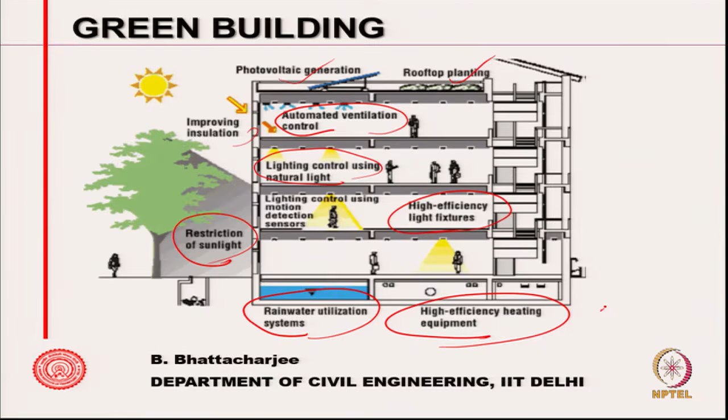LEED actually started in USA, Leadership in Energy and Environment Design. There are similar parallels - it is essentially a rating system, and its knowledge base is actually a lot of information. So there are several of them worldwide. For example, this I have defined, Leadership in Energy and Environment Design.

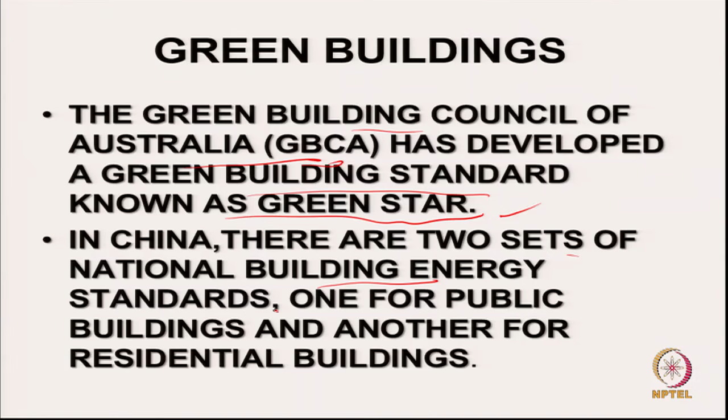Now, Green Building Council of Australia, GBCA, has developed a green building standard known as Green Star. So LEED is one of them which started in US, Green Star is in Australia. In China, there are two sets of national building energy standards, one for public building, another for residential.

Green Globe Environmental Assessment and Rating System represents more than one decade of research and refinement of a wide range of prominent international and organizational experts, etc. During 2002, Green Globe...

for existing building went online in United Kingdom. So if you look at United Kingdom, this is Green Globe. So Australia has Green Star, in UK Green Globe, right, as a global environmental method, they call it GEM, Global Environmental Method.

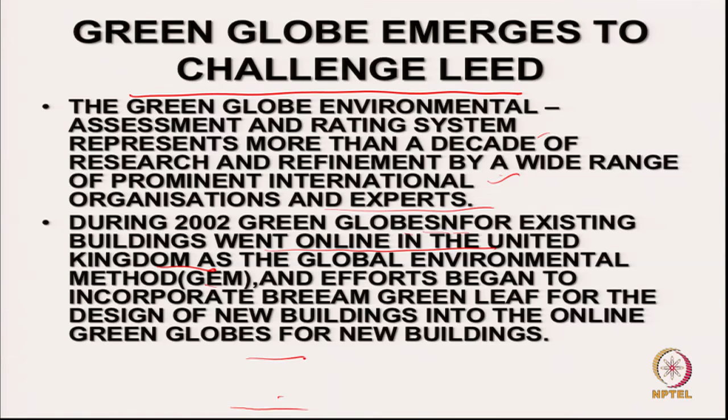And efforts began to incorporate BREEAM, Green Leaf, for the design of new buildings into online Green Globes of new buildings. So in UK they use this, called BREEAM, which is general global environmental method, and also has been used by Continental Association of Building Automation. So this has been used by other people too, to empower a building intelligence tool called Building Intelligence Quotient, BIQ.

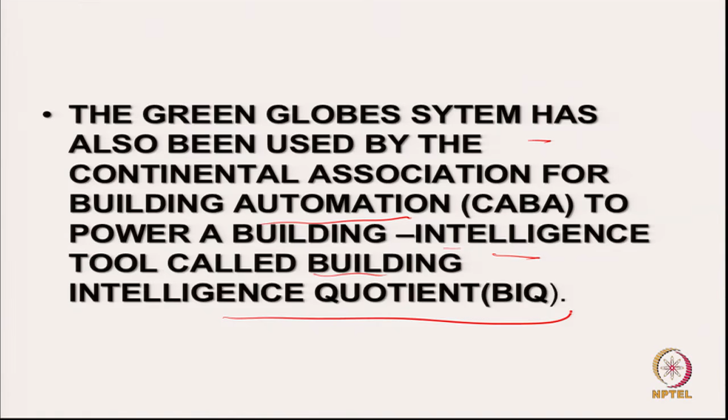So there are several systems, right. Green Globe's an alternative to LEED actually, that is in UK. It also is a rating system, provides assessment tool for characterizing a building's energy efficiency and environmental performance. So essentially you can compare buildings, and LEED gives a rating. The system also provides guidance for green building design, operation and management.

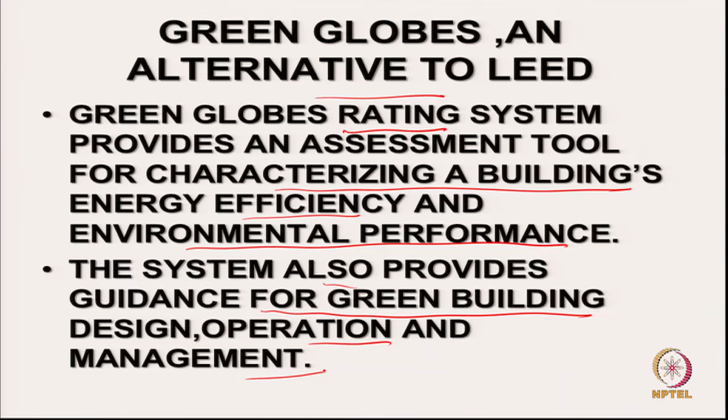So if you look at it, several of these ones: LEED, US Green Building Council - this is what has actually developed this, and it's generally used in US and Canada. Green Globes, GBI, GEM, etc. - US, Canada, UK mainly them. Green Building Guidelines, National Association of Home Builders, US. In US you have more than that, but this one has become very popular.

BREEAM is Building Research Establishment, UK - they have a rating system, and Green Star is the Green Building Council of New Zealand and Green Building Council of Australia. So Australia, New Zealand, they use Green Star. CASBEE is Japan Sustainable Building Consortium, Japan. SB Tool 07, International Initiative for Sustainable Built Environment, this can be used worldwide. And in India, they had TERI GRIHA, The Energy Research Institute, that is in India.

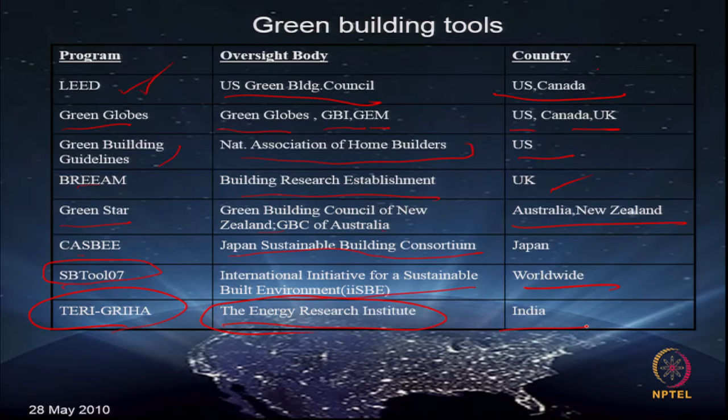So there must be some more also. You can see there are a lot of rating systems actually developed, which allow for comparison of one building from another in terms of their greenness, if I may say so, the strategies that we discussed a little bit earlier.

So let us take an example of LEED and that will give the idea. Rest all are simple, it's not very big. Essentially, if you have something, some features built in, you get a point, a rating point, and higher the rating point, the better the building is. So they classify in certain panels. Any of this rating system, they work like this.

In fact, they were supposed to have been developed based on experts' views - experts are supposed to give their opinion, and then they are collated. Like TERI GRIHA has been trying to do something recently for existing buildings, and they said they are using, those from construction management, analytical hierarchy process. In fact, when subjective things are there, one can use tools like fuzzy mathematics and fuzzy analytical hierarchy process to arrive at those rates. But I have not been able to find out how these rates have actually been arrived at.

So this rating, as said, has been given by the experts - awarding points relative to performance. The designer can select the points that are most appropriate to their project and achieve a LEED rating. This is the procedure followed by and large by everybody. A total of 100 plus 10 points is possible.

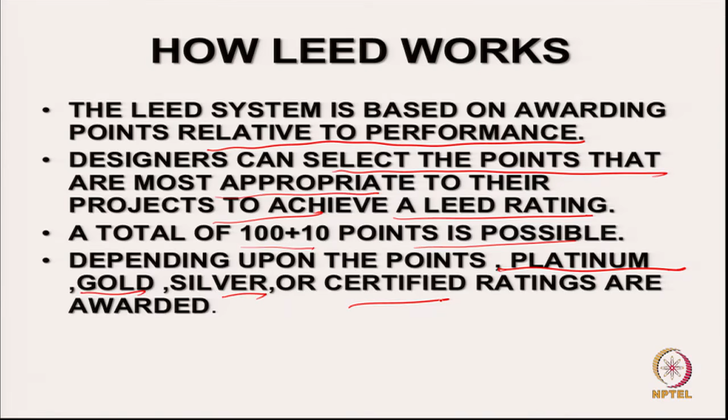Depending upon the points, you either get a platinum rating, that is the best, gold rating, silver rating, or just certified. So these are the kind of ratings given. Somebody can be proud of it, my building is platinum rated, but nothing more than that really, because you do not get any fiscal benefit at the moment.

There is a minimum requirement, and this must be totally complied with. Total compliance is mandated, meaning the minimum requirement must be satisfied, otherwise it will not even be considered. So to consider this, you need minimum requirement.

The project must consist of a complete permanent building or space on already existing land. Obviously this is the first requirement. It must be executed within a reasonable site boundary. These are obviously mandatory.

Minimum floor area requirements must comply with floor area, some kind of minimum floor area, floor to space ratio or something of that kind. It must consist of a share of energy, minimum, owners must consent to share energy with US Green Building Council or Green Building Council of India, because LEED has been adopted by the Green Building Council of India. So as far as India is concerned, they must share the energy usage with this organization.

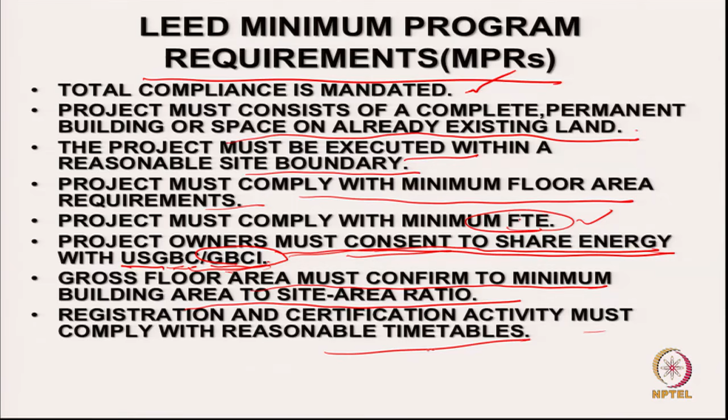Gross floor area must conform to minimum building area to site area ratio, FAR etc. It must satisfy those, and registration and certification activity must comply with reasonable timetables, so you give a time frame.

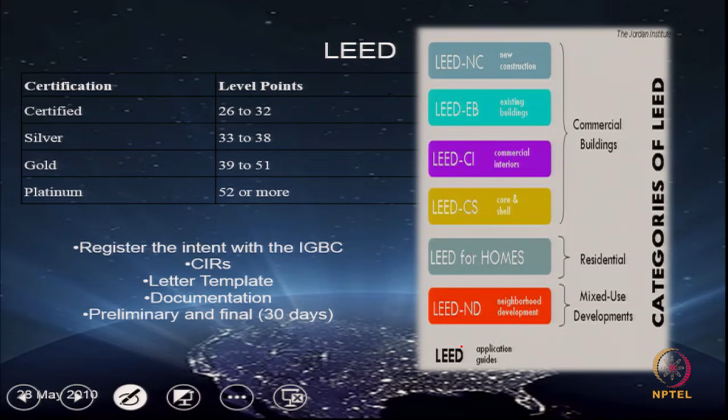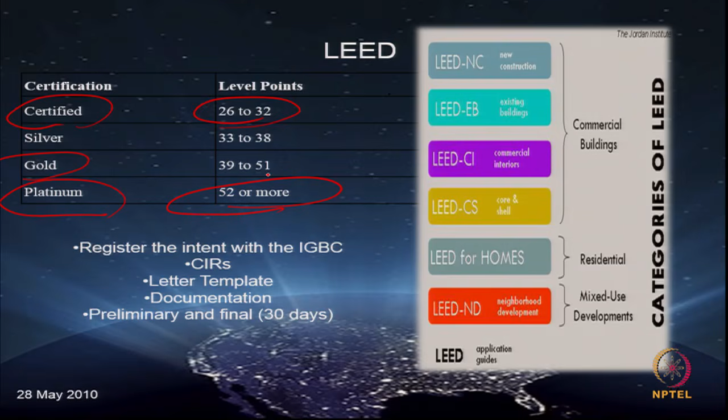Then you get points on different counts. If you get 26 to 32 points, 52 or more out of 69 points as we shall see, percentage wise you can find out. So 52 or more is platinum rated, gold is 39 to 51, and silver is 33 to 38.

For different types of buildings occupancy is also there, mixed use development, LEED for homes which is only for residential, and there are sub-ones. For commercial buildings, for example, these are commercial interiors. You can get it for homes, mixed use development, new constructions, existing buildings. This certification you can get for all, even part of the building itself, for example interior, core and shell, and so on.

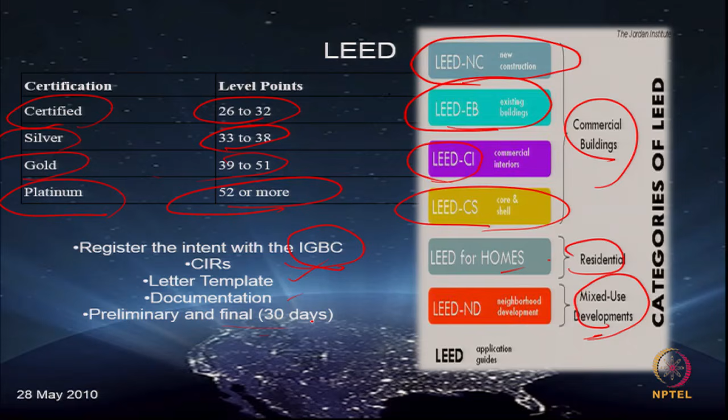Indian Green Building Council is the one which deals with this. You have to have a letter, documentation, etc., preliminary and final within 30 days. So a time frame is also mentioned, something like that should be there.

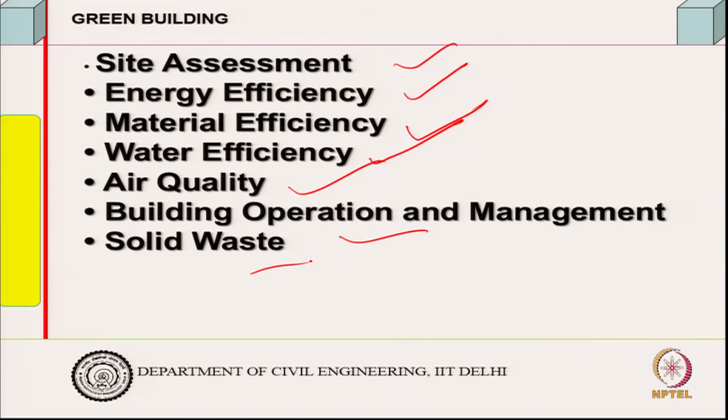Site assessment, energy efficiency, these are the features on which it is actually decided: material efficiency, water efficiency, air quality, operation and management, solid waste. So these are the features, and on each of them you get certain points.

Let me see which is the highest. This is 17 out of around 69, so it is around 25%, energy is the major share. Then material and resources is around 19%, points are 13, indoor environment 15 which is 22%, water efficiency 7%, which is 5 points, and sustainable site 14.

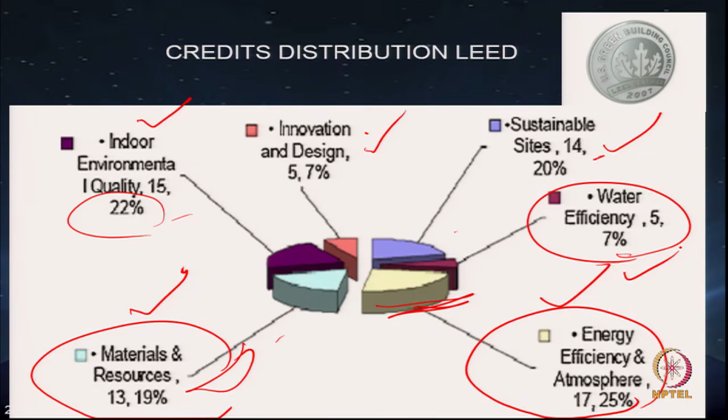So you see the features are energy, materials, indoor environment, additional innovation and design, sustainable sites, and water efficiency. If you see point counts, this is 17 plus 13 plus 15 plus 5 plus 14, which makes it 64 points. Additionally, you can get another 5 for innovation and design as per the criteria given.

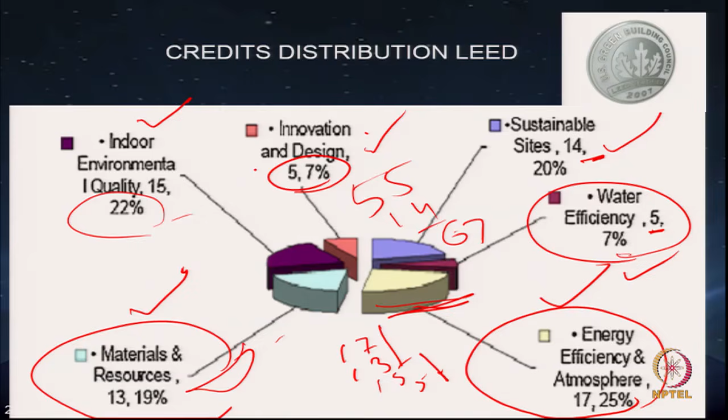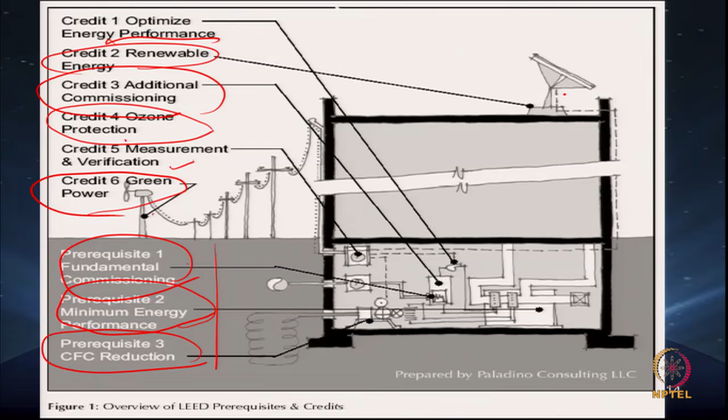Supposing you get green power, then you get some more credit. Measurement and verification, you get some more credit. Ozone protection, that is like fluorocarbon systems you are not using in your refrigeration, or if you are reducing the ozone issues, protecting the ozone, additional commissioning and renewable energy, etc. So, if you are using wind power, using some renewable energy, solar panels, etc., you get points, right.

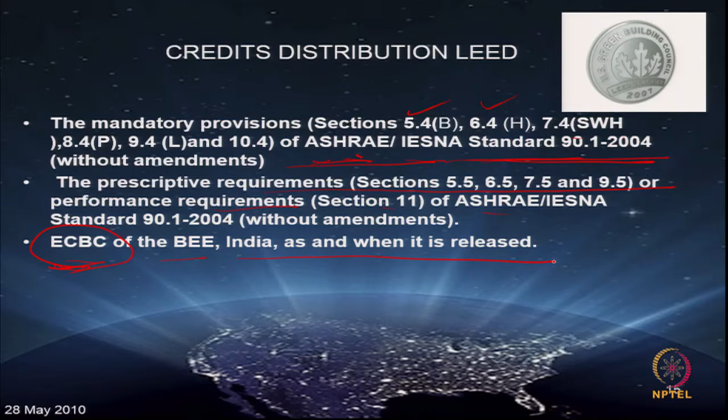So, mandatory provision that is there in the LEED document, section 5.4 B or 6.4 H, etc. These are according to the ASHRAE or IES, American Society of Heating, Refrigeration and Air Conditioning Engineers standard, without amendment. The prescriptive requirements of these are also given. So, it should be as per ASHRAE guidelines, and in India, of course, ECBC, the energy conservation building codes, we have already talked about this. It was released anyway, so it is as per this. So, minimum specification should be according to that, right.

Then if you reduce down the energy, you can get 10 points. If you reduce down the energy by 42% from a reference, you get 10 points. If you reduce down the new building 10.5% from a reference, then you get 1 point, and so on. You have to prove it. That is the methodology to calculate, and you have to prove that you have actually reduced down the energy than the standard building or standard scenario. By 42% you get 10. If it is an existing building and you want a LEED rating, then 3.5, and this should be 35%. So, prescriptive compliances first must be satisfied, right.

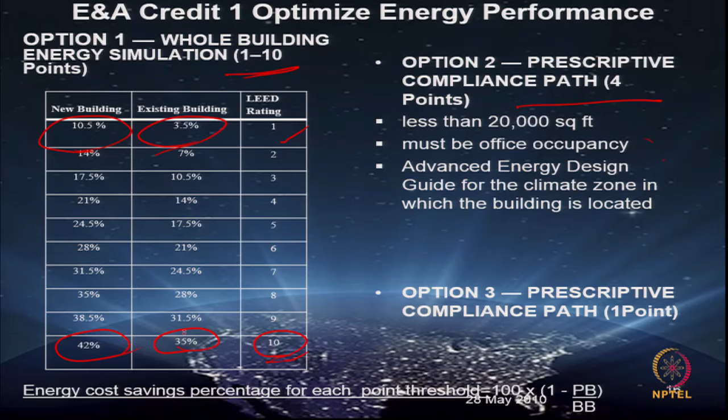So, these 10 points you can get depending upon the guidelines, that if you have saved so much energy, you get this much points. So, a demonstration procedure is also given. You will possibly be using software to show it; for example, ECBC guidelines give you certain specific types of software which you can use. Capability of the software, for example, it must be able to calculate the annual energy load, robust software and so on. So, several features of the software are already specified in energy codes, and according to that you calculate and show that you have actually achieved some percentage of energy saving, then you will get these points. So, percentage-wise saving, correspondingly you get points. So, this is energy related.

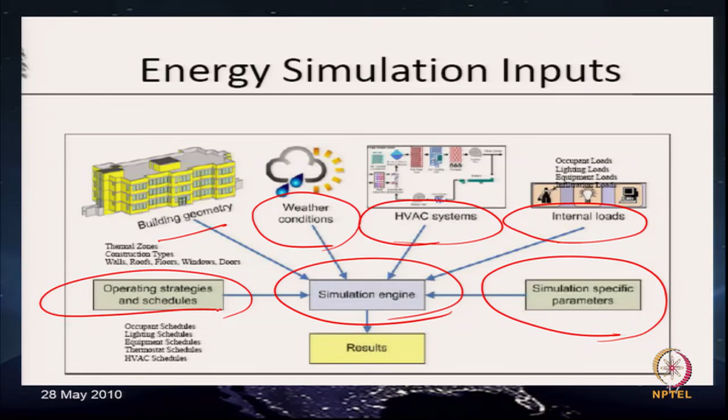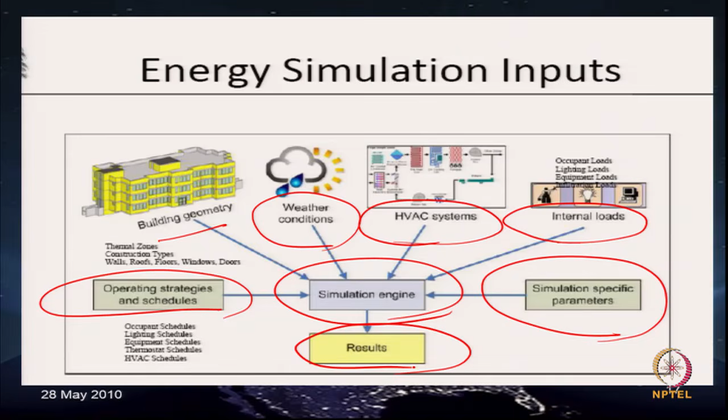So, you have energy simulation inputs, that is what I was saying, software. Building geometry, simulation engines which are specified like EnergyPlus, Ecotect or possibly eQUEST and so on. There are several robust energy simulators. Then climate and weather data, HVAC system and internal loads, appliances and things like that, what we call casual load, and simulation specific parameters, operating strategies and schedules, because an office might be 8-hourly cooling rather than a hospital which is 24-hourly. We have seen that earlier also, and through the results you should be able to show that you have reduced the energy consumption.

Then sustainable sites, 13 points, site selection 1 point, development density and community connectivity 1 point, and for each one what will qualify is given, right. Brownfield redevelopment, you get 1 point; alternative transportation, public transport access, you get 1 point; alternative low emission, for example electrically driven vehicles, today you have all kinds of electric 3-wheelers, then you get 1 point. Alternative parking capacity, restore the habitat of flora and fauna and reduce site disturbances, stormwater design, quantity and quality control, heat island effect, light pollution reduction, etc. So, if you do, you get points. This is how you get points from site selection.

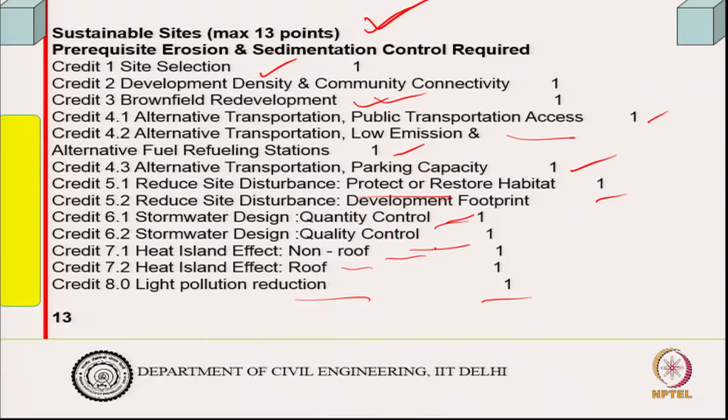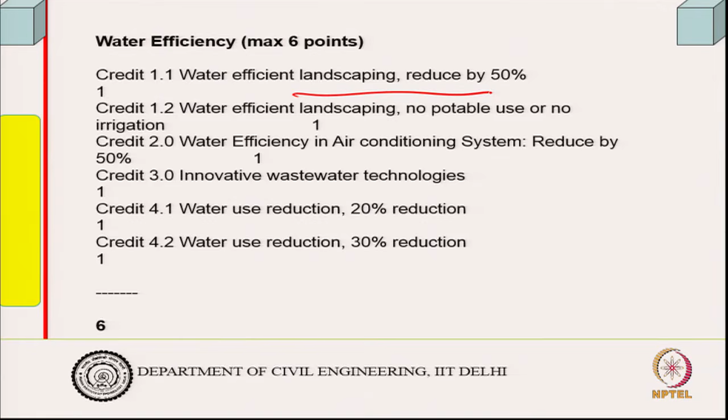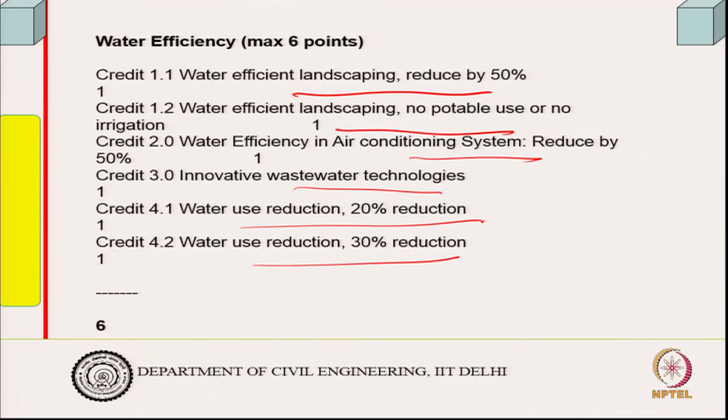So, water use reduction 30%, water use 20%, etc. Then energy and atmosphere, so HVAC equipment required, optimize the machines basically. 10 on-site renewable energies. Earlier I was talking of envelope, 10 points, right. Here now you have the machines.

So additional commissioning, ozone depletion issues, for example, not using those refrigerants which could lead to ozone depletion. Minimum of course is specified already. Beyond that, if you are using such a system for refrigeration which does not have any kind of environmental impact, including ozone depletion, then you get 1 point. And total again green power 17. So if you are using green power, solar power to do the refrigeration or cooling, 17.

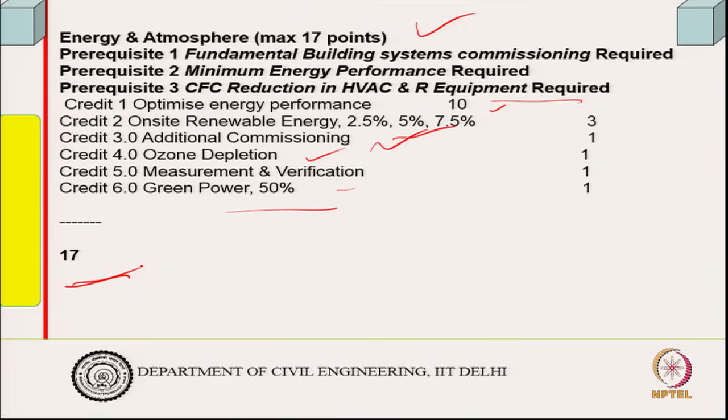So total 17. So in this manner we have seen 3 of them. Material and resources 13: recycle, reuse 75% of the existing wall, floors and roof, retrofitting it. So using the same in the new brownfield development sort of, building reuse 100% of existing wall and then remodel it, shell, complete shell if you are using it 50%, non-shell 1 point. Waste management, construction waste management during construction of a new building. So divert 50% from disposal, use them, that is there itself, right.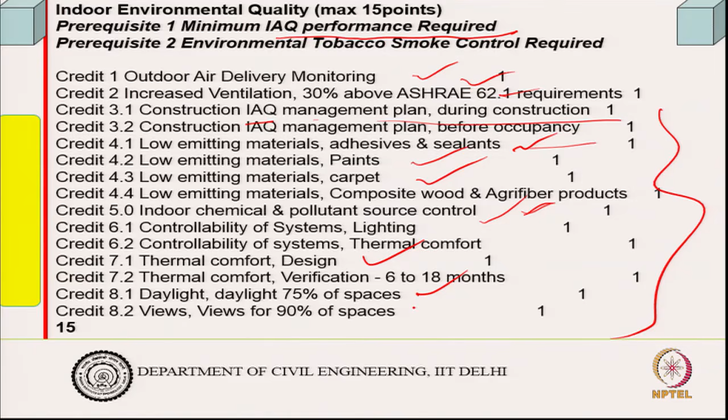And if you have designed them, all of them, for example, thermal comfort design 1, verification, and if you do verification, a scheme is also there, measure the temperature and maybe find out some indexes and see that it is working fine, daylight and so on. So 15 you can get. Then innovation and design maximum 5 points. Some innovation and design, but they have given you guidelines, because it is a very grey kind of a statement, innovation and design.

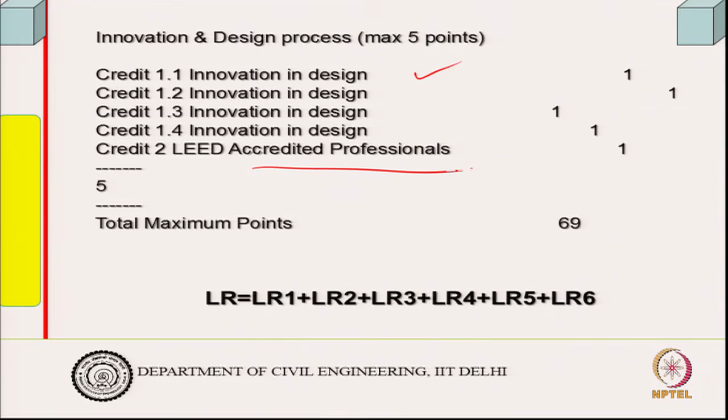So if you have involved LEED accredited professionals, you get 1. They do accredit those people, so there are a number of them consultants today. So total maximum you can get 69, in percentage 100, right, 100% corresponds to 69. So LR1, LR2, LR3, etc., LEED rating 1, LEED rating 2, LEED rating 3, sum total, and if your sum goes beyond 52, then you get a platinum rating. If it is just around 26 to 32, you are certified, below that you are not anything. So that's how it is, and all other systems follow the same.

Depending upon the feature, they give you a number, and these numbers are based on experts' opinion. They might have done a questionnaire survey. I am not sure actually, because this is not really a very physical quantified methodology. It can be done. Whether it has been done or not, I couldn't find out, because in the background literature I checked for LEED, I couldn't find out. But you can take interviews or opinions of a very large number of people; in construction management and operational research you have got techniques for this kind of thing.

And from that you try to arrive at it. There are several techniques, factor analysis, fuzzy analytical hierarchy process. So, you ask them which are the most important factors, eliminate the others. It might evolve over time, might change also, but at the moment this is the scenario and this is the kind of rating. So, okay, these are there, let me see how much is there. This is the same thing.

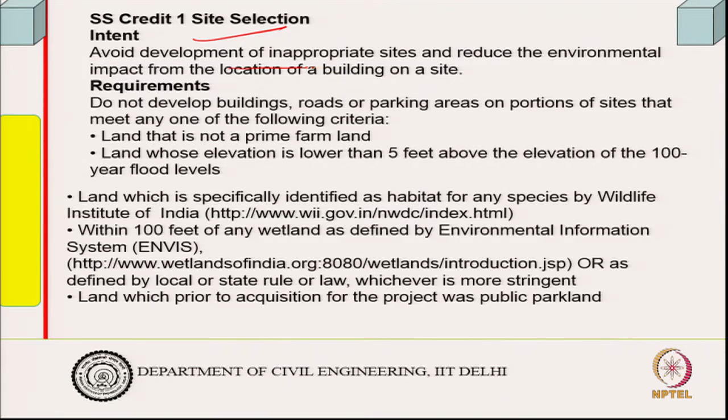So, basically first one is site selection, avoiding an inappropriate site, reduce environmental impact, and do not develop buildings, roads, parking areas. But after knowing these points and what relates to each point, you can even optimize, right, if the decision variables are somehow quantified or codified. If the decision variables are quantified or codified, you can actually maximize the rating. So, using an optimization tool, you can actually maximize the rating even before planning or during the design stage itself.